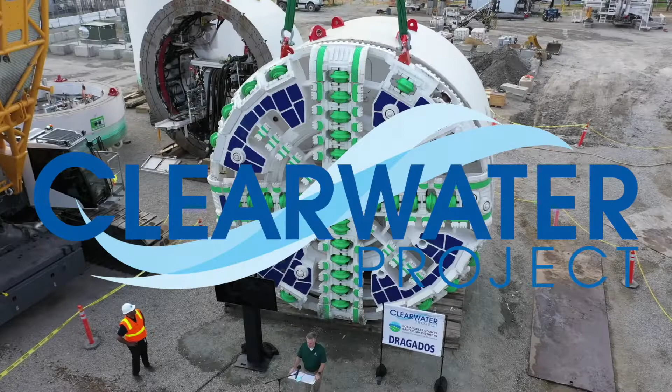I'm at the south end of our Joint Water Pollution Control Plant, which sits at the border between Carson and Wilmington. This is where most of the construction activity for our Clearwater project will take place. We're holding today's event to celebrate an important milestone on our Clearwater project, which is being built to protect local waterways. Soon, the huge tunnel boring machine, or TBM, that you see behind me will be lowered below ground and begin a 3.5-year tunneling journey.

Our program today is about 25 minutes long, and it involves a few speakers, the unveiling of our custom-built tunnel boring machine, and recognition of the finalists in our TBM naming and art contest. With me is Basil Hewitt, an engineer and Sanitation Districts supervisor. Now, because the TBM is so big, Basil's going to introduce you to it in pieces throughout our program. After the main program, we're going to offer a virtual tour for those who want to stick around and learn more about the tunneling process or ask questions.

Our first speaker this morning is Robert Ferrante, Chief Engineer and General Manager for the Sanitation Districts. Robert?

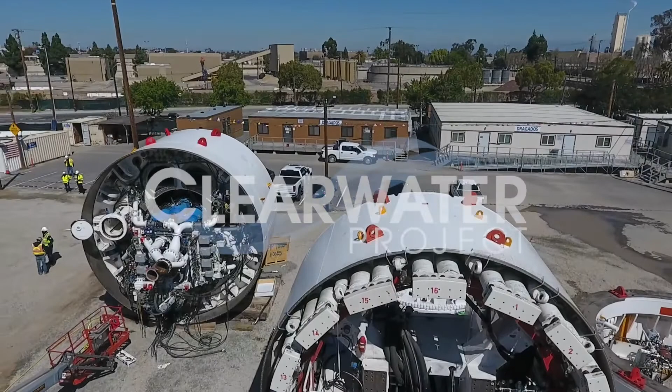Hi, I'm Glenn Acosta, an engineer with the Sanitation Districts. I'm at the south end of the Joint Water Pollution Control Plant, where most of the above-ground construction for the Clearwater Project will occur. The joint plant is critical because it treats sewage for 5 million people.

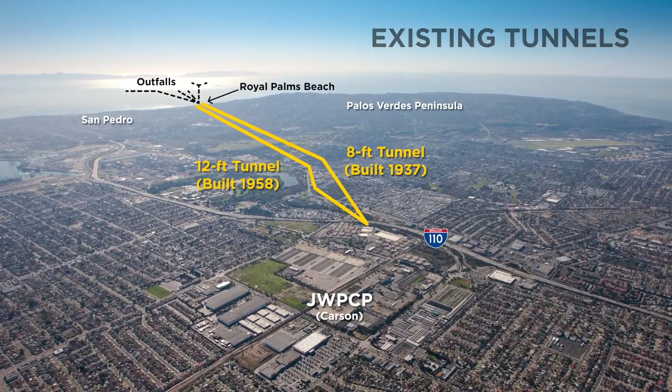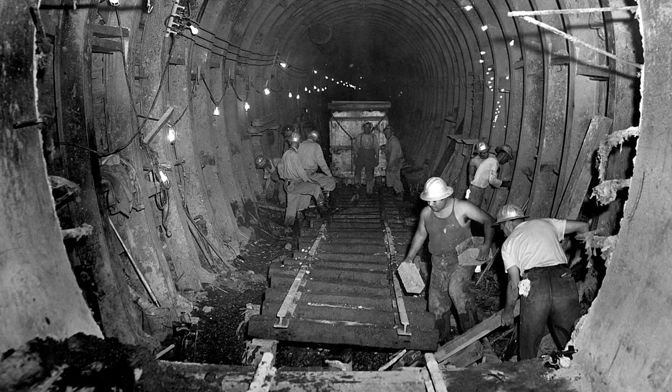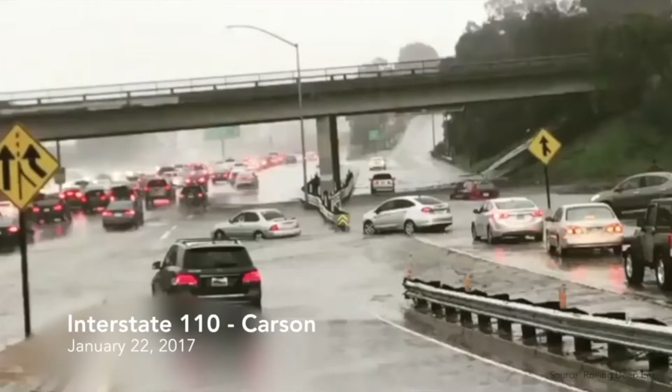The plant depends on 2 old tunnels to carry treated water to the ocean. These tunnels were built 60 and 80 years ago, and there are several concerns with the tunnels. First, the tunnels cannot be taken out of service for inspection or repair because they continuously carry flow. Second, the tunnels were not built to current seismic standards, yet they cross 2 earthquake faults. Third, the tunnels' capacity could be exceeded during heavy storms when rainwater gets into the sewer system.

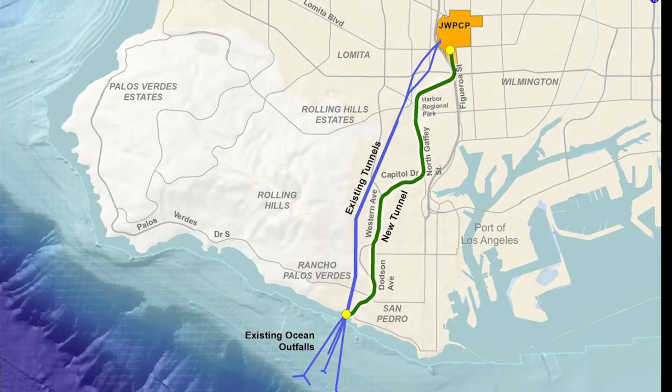After years of planning and community outreach, we concluded that building an 18-foot diameter tunnel was the best way to address these concerns. The new tunnel will provide reliability for a sewer system that serves almost half of Los Angeles County. The new tunnel will run 7 miles from the joint plant to Royal Palms Beach in San Pedro. And, based on community input, the new tunnel will be built almost entirely under city streets.

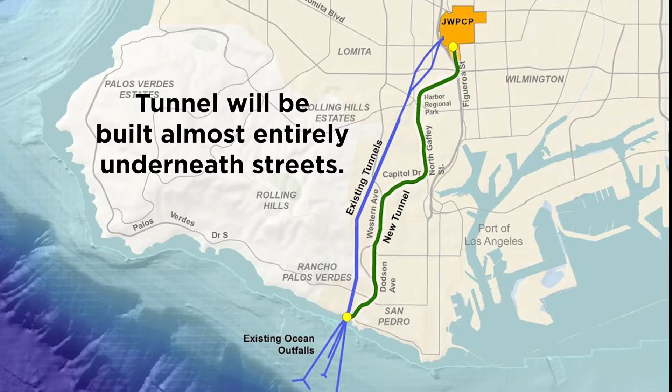A state-of-the-art tunnel boring machine, or TBM, will be used for this project. The TBM will be lowered down the shaft about 90 feet and begin tunneling this summer. Tunneling is expected to be finished in the year 2025 and the overall project completed a year later.

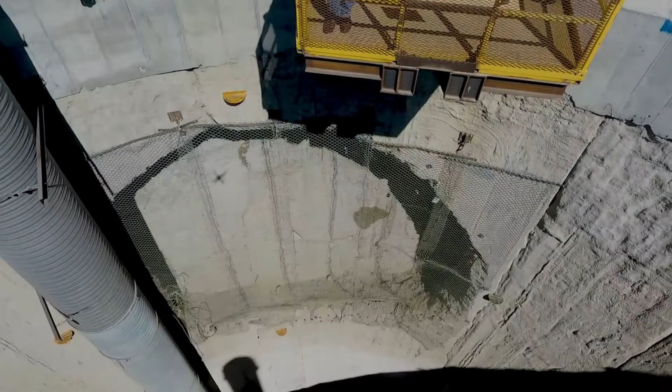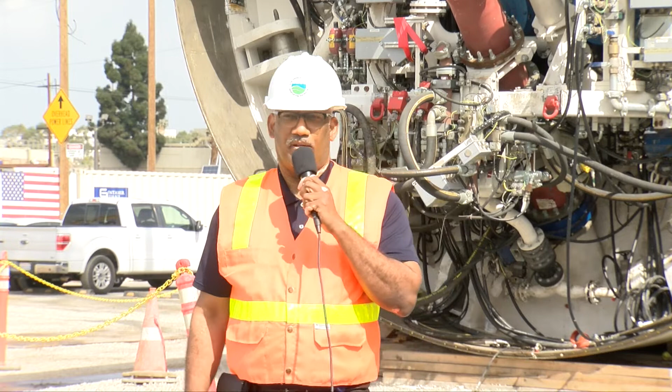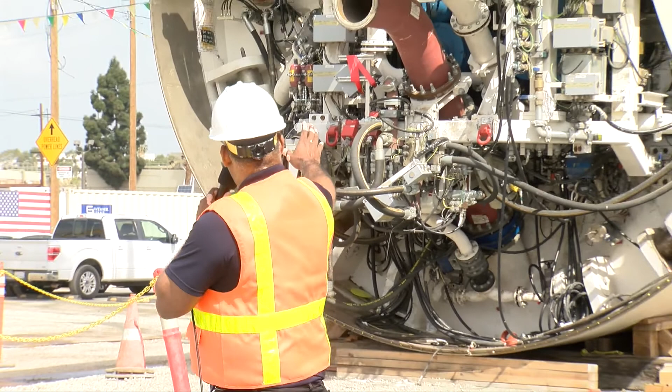Good morning, everyone. What a lovely day to look at a tunnel boring machine. What you saw behind the podium, behind Robert and Brian, was the cutting head of our tunnel boring machine. I'm on the backside of that cutting head. If you look over my shoulder, this is the backside of the front of the tunnel boring machine. Embedded in this end, on the backside, are 7 electric motors, each 215 horsepower. They rotate ever so slowly and build our tunnel every day.

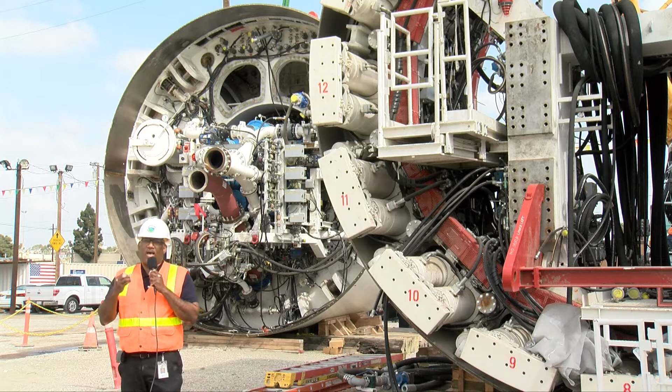They build between 30 and 50 feet of tunnel per day, and that translates to a top speed of 2 inches per minute, because this is a precise tunneling project. Another key in the front end of a tunnel boring machine, this is like the locomotive of a train, are these hydraulic thrust jacks, these white things here. There's 16 pairs of these, and they're all hitched together, like the front end of a train. These push off and move our tunnel boring machine forward on its 7-mile journey.

So there you have it, the front of our tunnel boring machine. Think of it as the locomotive of our TBM. Back to you, Brian.

Thank you, Basil. Our next speaker is Director Kathy Warner, representing the City of Whittier. Ms. Warner first joined the Whittier City Council in 2004, and she has served as the mayor on 3 occasions. She is also chairperson of Sanitation District Number 2, which is the administrative district for our agency. We appreciate her strong interest in the work that we do here at the Sanitation Districts, as well as the leadership that she's provided as our chairperson. Director Warner?

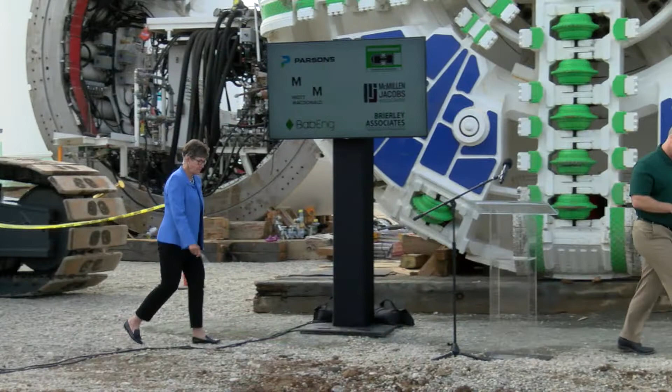Thank you, Brian. It's great to be with you all today. This is really exciting. I had no idea what to expect. It's really quite overwhelming. I've been a sanitation district director since 2005 and have followed this project since the planning days. This day has been a long time in coming. However, our very qualified staff has taken the right approach in carefully planning and designing such an important project.

On behalf of other sanitation district directors, I'm proud to serve on the governing board of the Sanitation Districts, and I'm excited to see the progress being made on this important project. I also want to thank all the students that participated in the naming and art contest and congratulate those winners. And I look forward to hearing from my colleagues on the board, Joe Buscaino and Pat Furey. Thank you.

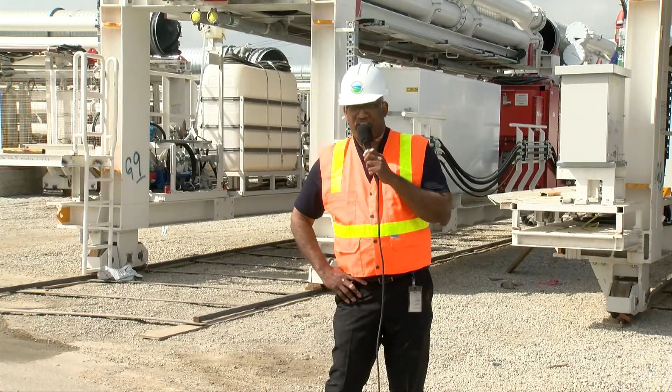And now we're at our second location. So the first stop showed you the front of the tunnel boring machine. Now we're at the second stop. This is called the trailing gear. Think of it as housing a little city that supports the front of the TBM.

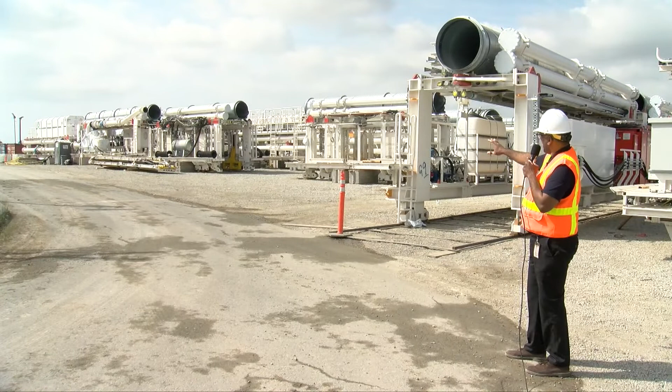And each of these segments, trailing gear segments you hear, think of them as rail cars. They will be hooked together one after another, and they will be pulled by the locomotive, the front of the TBM. So as this tunnel boring machine goes further and further along the alignment, all these trailing gears will be hooked together for a total length of about 700 feet of trailing gear and about 80 feet of the front end. So for a total length of 780 feet.

So let's look closer at the trailing gear. These tubes bring in important fluids, oil, water that's needed at the front of the tunnel boring machine. If you look at the big tube at top, that's for ventilation. It brings air all the way to the front of the tunnel boring machine where the cutting head's at. And then those 2 white tubes are very critically important.

One brings in a slurry or a mud, and what that does, it goes to the front of the cutting head and it lubricates the cutting head. It also stabilizes the front of the cutting head, and then that slurry is mixed with rock, gravel, and sand, and it becomes a pumpable mixture that gets pumped all the way out back to the shaft site, and then we will treat that when we bring that to the top floor. So there you have the first 2 locations, the front of the TBM, the trailing gear, for a total length of 780 feet. Back to you, Robert.

Thank you. Our next speaker is Joe Buscaino, councilman for the City of Los Angeles' 15th District, which runs from Watts to the Port of Los Angeles. The Clearwater Tunnel will go underneath his district. Councilman Buscaino first joined the City Council in 2012 and currently serves as its president pro tem. He is chair of the Trade, Travel, and Tourism Committee, which oversees the Port of Los Angeles, LAX, and the LA Tourism and Conference Board. He is also director for several sanitation districts and chairperson for 2. He is the immediate past president for the National League of Cities, where he continued to advocate for the federal government to increase infrastructure investment directly to cities, counties, and states.

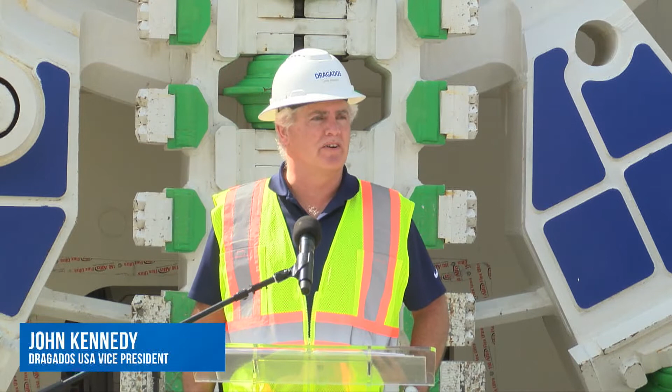Thanks again. The company we've hired to construct the Clearwater Tunnel is Dragados USA. Dragados was selected from a small group of contractors who have the expertise to do a project like this. Our next speaker is John Kennedy, Vice President of Operations for Dragados. Mr. Kennedy. Thanks, Brian. Dragados has been building large tunnels all around the world for over 70 years. It's our proud pleasure to be working with the sanitation district on this important project.

We've acquired a state-of-the-art tunnel boring machine, custom built for this project. We believe we have the right machine, we have the right plan, and definitely the right people. Soon we'll start lowering this tunnel boring machine into the shaft, where we'll complete assembly and then begin the mining progress all the way to the beach. And in about 5 years, we hope to see you all again for a celebration ceremony at the conclusion.

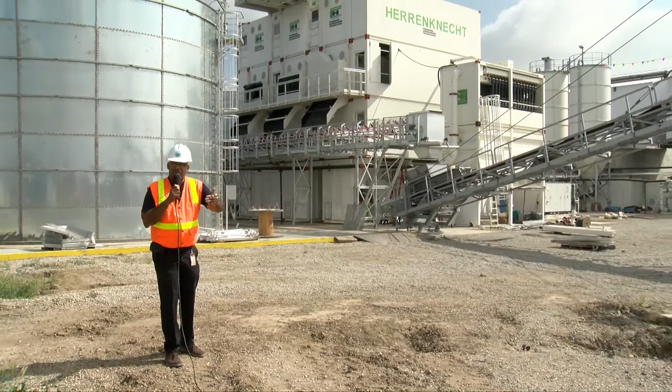All right, we're here at our third and final stop of our behind-the-scenes tour of our tunnel boring machine. We're at the slurry treatment plant. In most mining or tunneling operations, there are a couple of ways of removing the soil and rock. You can have conveyor carts, rail carts, conveyor belt. For our tunnel boring machine, we're going to be using slurry, as I mentioned in the previous stop. So at this plant, we create a slurry, which is a muddy type substance. We pump it to the front of the cutting head that you see behind the podium with Brian and Robert.

And that slurry mixes with the rock and the gravel and dirt and becomes a pumpable mixture. We pump all that stuff from the front of the tunnel boring machine back to the shaft site, up to the ground surface, and then in this building, we separate the slurry from the dirt, the rocks, and gravel. That dirt, rock, and gravel then comes out of this building. It's put on a conveyor belt that's loaded on trucks, taken off site.

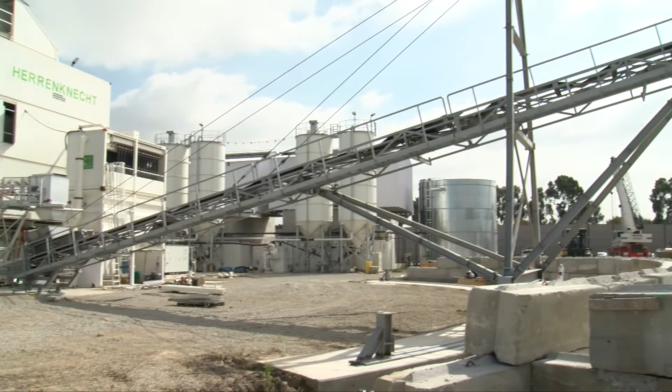And then the slurry, the cleaned up slurry, we recycle that to the front of the cutting head, to the front of the tunnel boring machine. So there you have it, a quick 1, 2, 3 of everything you'd want to know about a tunnel boring machine. Back to you, Robert.

Thanks, Basil. Before I introduce our tunnel boring machine, I do want to thank John Kennedy from Dragados for being here. They've been a great partner on this project, and we're lucky to have them. I also would like to thank Council Member Joe Buscaino for his support of the sanitation districts and the City of Los Angeles for their assistance in moving this project forward with their help as well.

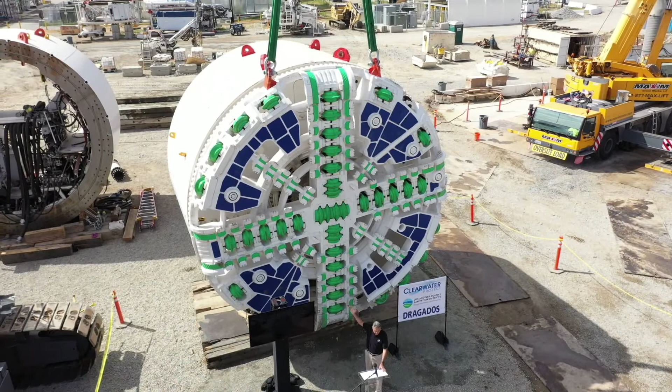But now it's my pleasure and honor to formally introduce Rachel, our tunnel boring machine. The machine is built to slowly carve its way through soil and rock deep below the ground without interrupting our daily life in the community above. Rachel was built by one of the world's top TBM manufacturers. She was tested at the factory and then had to be disassembled and shipped to our site in pieces. When fully assembled, Rachel will be over 2.5 football fields long and serve like a small underground city.

The name Rachel is for Rachel Carson, the author of Silent Spring, a book that is credited with sparking the environmental protection movement in the 1960s. This is particularly an appropriate name because the Clearwater Project is about protecting water quality, and I can't think of a better environmental hero to honor as a namesake for the tunnel boring machine. The name Rachel came from a student naming contest. The winner and other finalists will be recognized in our next segment.

In our next segment, Torrance's Mayor Pat Furey will introduce the finalists of our TBM Naming and Art Contest. Mr. Furey first joined the Torrance City Council in 2008 and has served as the city's mayor since 2014. He's also chairperson on 2 sanitation district boards. Mayor Furey is a voting delegate on the National League of Cities, and he is chairperson of both the state and federal legislative advocacy committees.

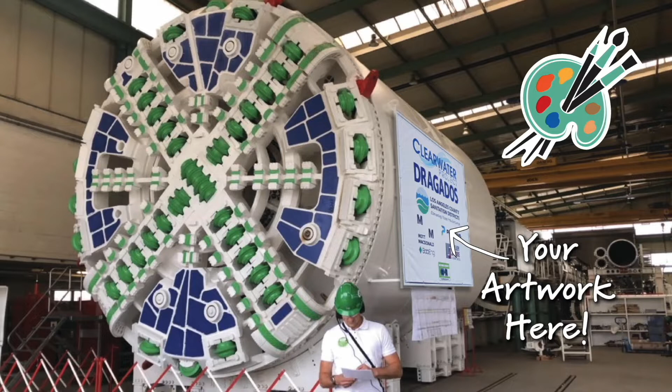Thanks for participating. There were also art contests for elementary, middle, and high school students. For each contest, students were asked to submit original artwork that shows why it's important to keep our rivers and oceans clean.

Congratulations to our elementary school finalists. Dahlia, Aaron, and Dagny, you all did a great job. Give yourselves a round of applause. I'm now with the middle school art contest finalists. Our third place winner is Natalie Ezadijian, a 7th grader at C&E Merdinian Armenian Evangelical School in Sherman Oaks. Natalie's art is a reminder of what can happen if we don't take care of our oceans.

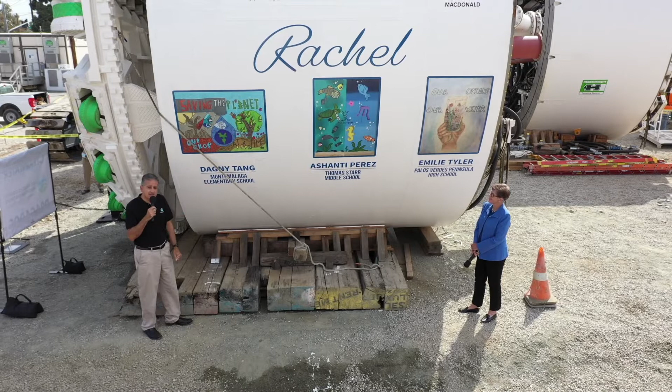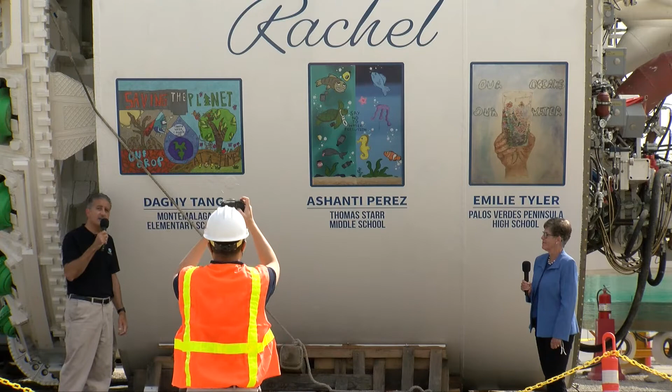And here is the artwork that is along the side of our tunnel boring machine. You can see the winners of the contest, and you can see, of course, we thank Hannah for coming up with the name Rachel. Hopefully this artwork, along with the Rachel name, will give us good luck as we make our 4-year journey to the coast and leads to a successful outcome. Once again, we'd like to thank not only the winners, but all the kids that contributed and submitted drawings and names for the project. All of them were very creative and original.

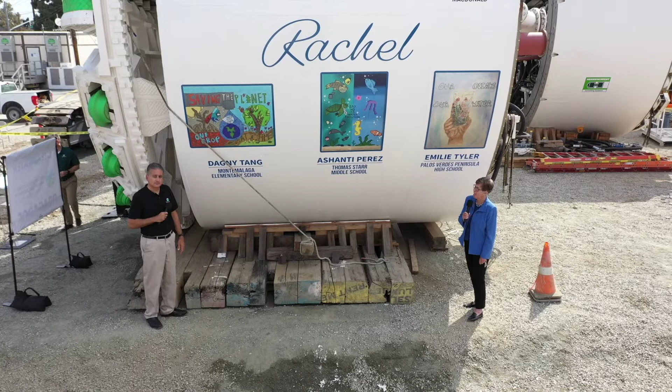Thank you. Thank you to all the children that participated of all the grade levels. We really appreciate your participation, and particularly Dagny, Ashanti, Emilie. Congratulations on having your pictures on the side of this awesome machine. Thanks again.

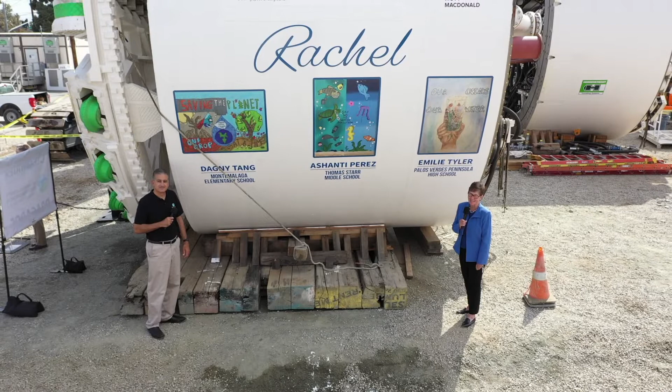Well, that concludes our main program this morning. On behalf of the sanitation districts, I want to thank all of our speakers. To find out more about the tunneling process, stick around for our virtual tour, which is up next. You can also find out more about the project using the information shown on your screen. Thank you for joining us this morning.

Now I want to hand things off to Russ Vicaria for the virtual tour. Russ is a supervising engineer in our construction management group. He and his team are working closely with Dragados to make sure that the project is a success. Russ, take it away. Hey, thanks, Brian. And good morning, and thanks everybody for joining us. I'm going to give you a brief overview of the tunneling process. And if you have any questions, please use the Q&A feature in Zoom during the presentation, and then I'll take questions at the end.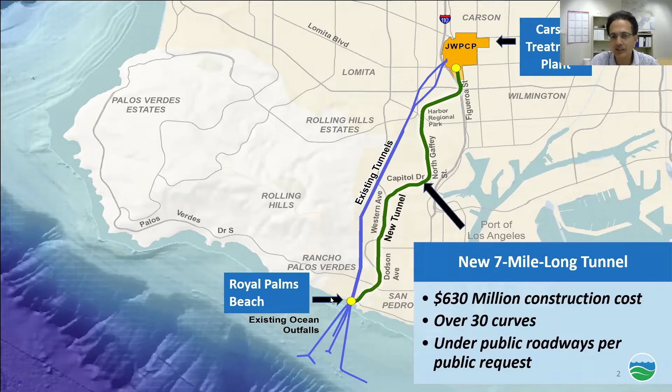So this is a 7-mile tunnel, $630 million construction cost with over 30 curves going all the way from our treatment plant in Carson to Royal Palms Beach. So the starting point of the tunnel, which Glenn talked about earlier, is the tunnel shaft. And here's the shaft site. It's an aerial view. The TBM ceremony you just saw was held in this location on the bottom left-hand corner.

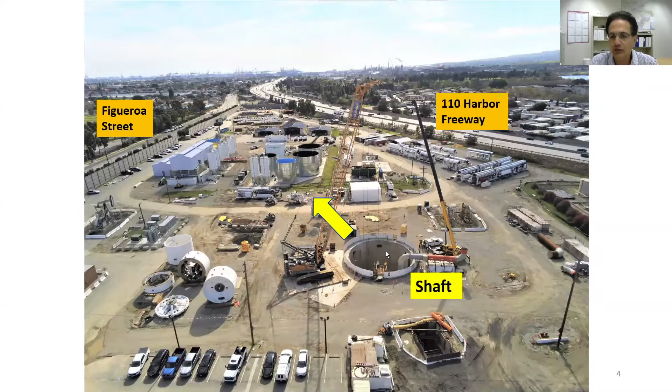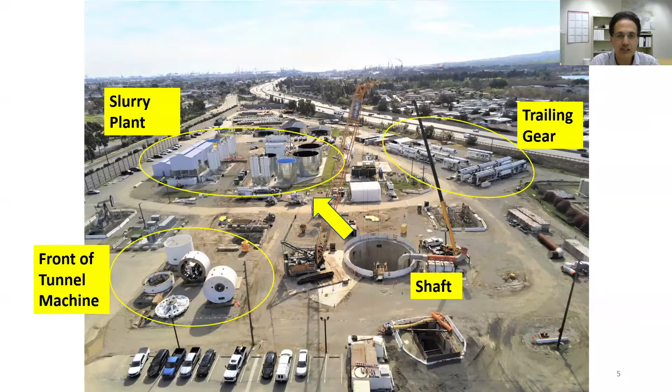To give you some bearings, here's Figueroa Street on this side. Here's the Harbor Freeway. And the shaft that the tunnel machine is going to be lowered into is shown right here. And the tunneling will go in the direction of this yellow arrow. So as Basil showed you during this presentation, we've got the front of the tunnel machine here on the bottom left-hand corner. The trailing gear is on the right side in this location. And then the slurry plant that'll support the tunneling is shown here. And I'll go through some of those in more detail.

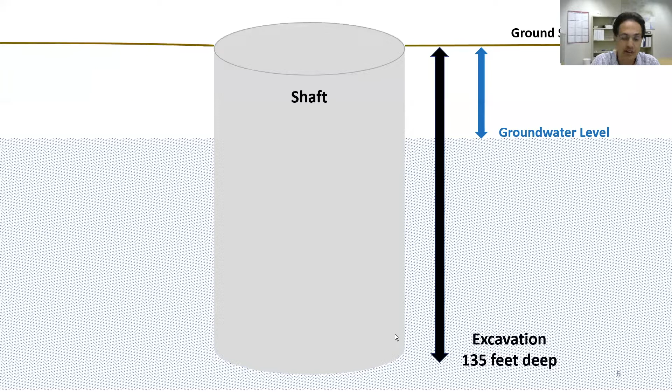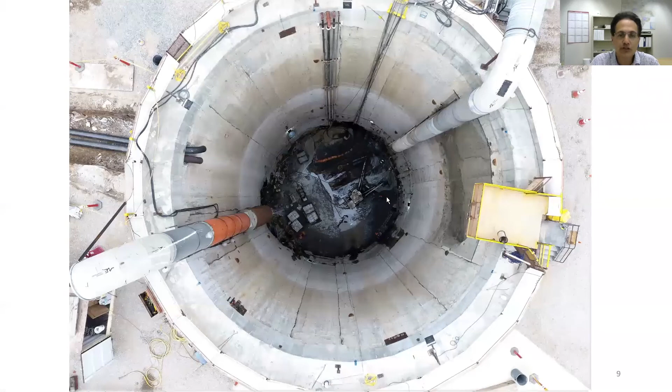So in general, the point of the shaft is to launch the tunnel machine. So here we have a side view of the shaft. Here's the ground surface. The groundwater level is here. So you can tell that we're going to be putting the tunnel machine well under groundwater. The total excavation for the shaft was approximately 135 feet. So the point of the shaft is to lower the tunnel machine into it and then to begin tunnel mining. And here's an overhead shot of the shaft that was taken a few weeks ago.

So here on the left side, we have the Carson shaft, where the tunnel machine is going to start. On the right side, you see the exit shaft at Royal Palms Beach. The ground surface is shown above. The tunnel route is pretty flat, but you can see the ground surface changes a lot. So the first half of the alignment is about 45 to 90 feet deep. And then the second half, we get as much as 460 feet deep under the Palos Verdes Peninsula. So again, we start on Figueroa Street, go through Harbor Regional Park, onto North Gaffey, then Capitol, then onto Western Avenue, Dodson, back to Western, and then to the Royal Palms Beach site.

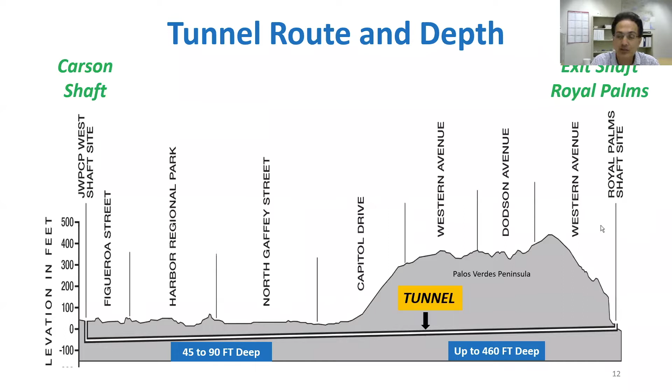So again, here's a similar diagram. It's just colorized. The tunnel route is shown with the red dots. Here we have on the left side the Carson shaft, the starting point, and then the exit shaft on the right side. And the groundwater is shown with the blue line. And you can tell that the groundwater is here. So we're under groundwater the entire way. And all the different colors you see on this section are different types of ground. So this tunnel machine has to be versatile enough to handle all those different ground conditions.

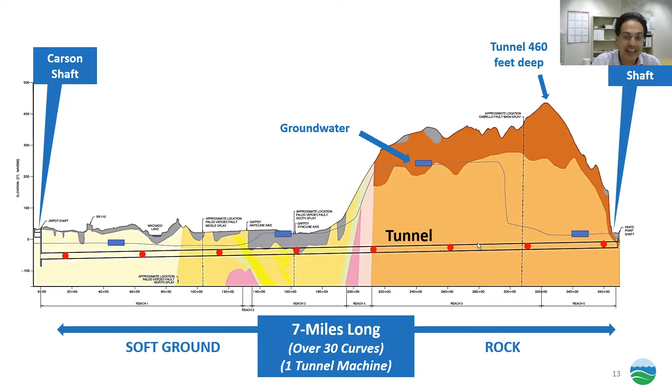So in summary, this 7-mile route, the first half is soft ground, but it's different types of soft ground. The second half is made up of rock. So again, if there was some intermediate shaft, the contractor could have even chosen to use 2 separate tunnel machines because the ground conditions are so different. But because we're going from one shaft, this tunnel machine has to be versatile enough to handle all these ground conditions. So let's talk about the tunnel machine itself.

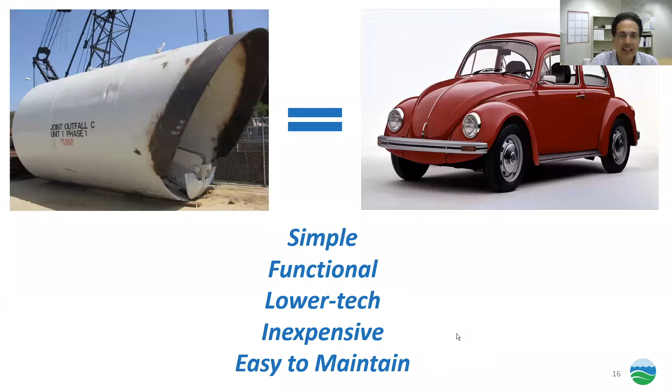And if the conditions are correct, it's a very effective tool. But this job involves numerous challenges that require a more advanced tunneling machine. First of all, we've got 7 miles of tunnel with 30 plus curves from one shaft. And if you look at a lot of the other local tunnel jobs going on in LA, many of them are straight 1 to 2 mile long tunnels. So this is considerably different.

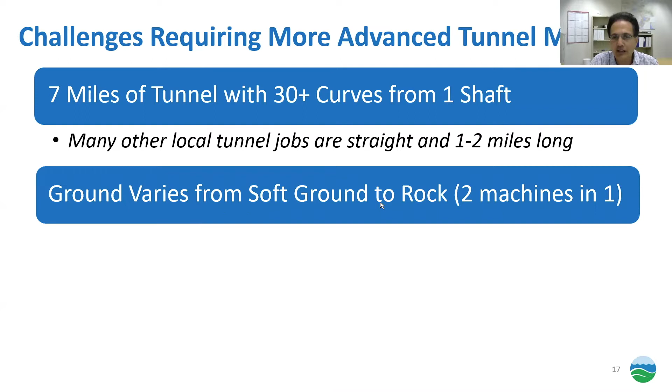The ground also varies on this job from soft ground to rock, and there are numerous subcategories within these. So really, you have one machine doing the job of 2 that has to be able to handle all these different conditions. The entire tunnel is also below groundwater level, so the tunnel machine has to be able to handle significant earth and water pressures and squeezing ground along the way.

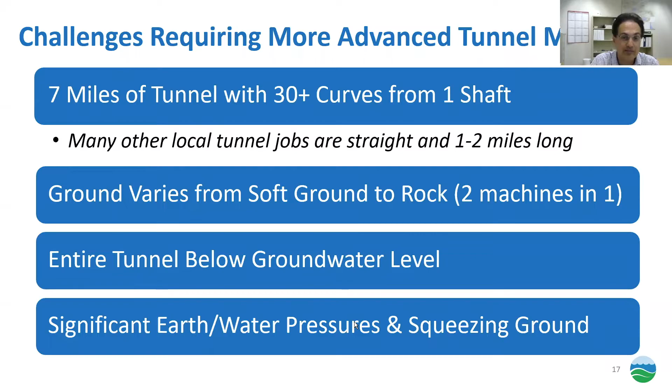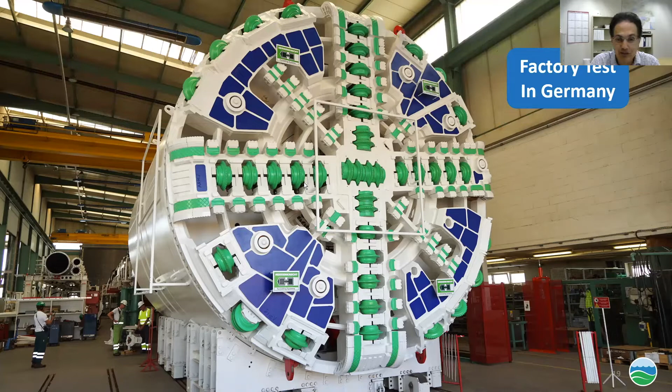So here is the tunnel machine. You saw it a little earlier today. It was fabricated at Herrenknecht factory in Germany, which is probably the premier TBM manufacturer in the world. It was put together and factory tested, then taken apart and shipped to the site. The diameter of the tunnel machine is about 21.6 feet. So it's like a 2-story building plus. The whole head rotates, and then you've got various cutting tools on the head that help dig the ground.

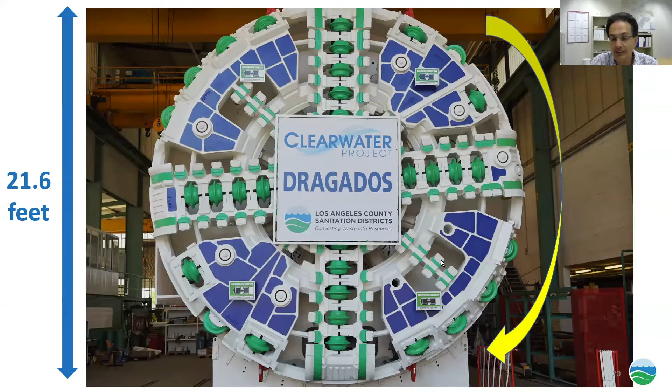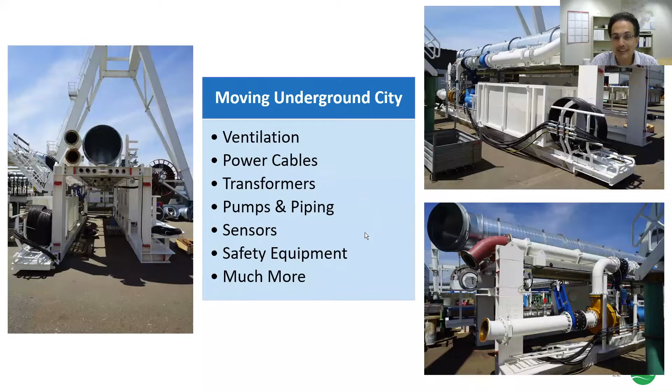So here's the front of the tunnel machine as it was assembled in the factory, and it pulls along this trailing gear behind it, which Basil talked about earlier. And again, as he mentioned, this trailing gear is like a moving underground city. It's got to support the entire tunneling operation, the materials, the personnel, the safety issues. So it's got ventilation, power cables, transformers, pumps and piping, sensors, safety equipment, and much more.

And one of the things it carries is a control cabin where the TBM operator sits and looks at various screens. This is a very sophisticated machine, so it throws out a lot of data which the TBM operator has to watch and make adjustments as needed during the tunneling process.

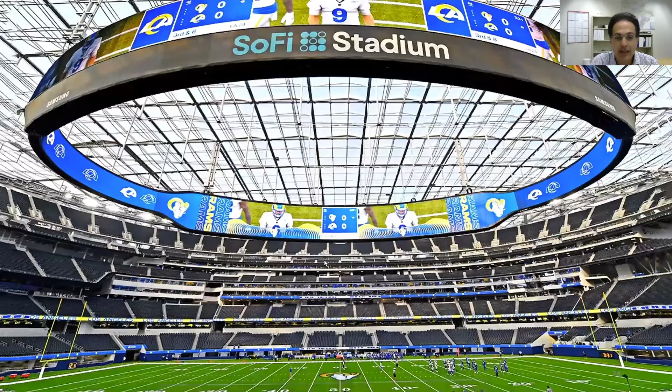So to give you an idea of how long this tunnel machine is, and it was stated a little bit in the presentation, but here we've got SoFi Stadium where the Rams play. We know that a football field is 300 feet long, 100 yards. So if you superimpose the tunnel machine on it, it not only stretches one full football field, it really stretches more than 2.5 football fields. And so it's over 750 feet long, and it was delivered to the job site in over 90 truckloads and then put together.

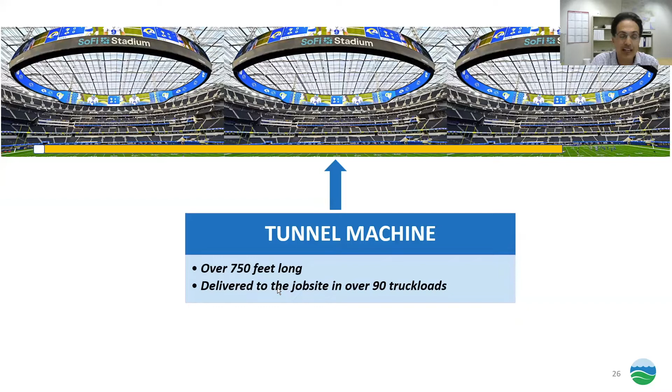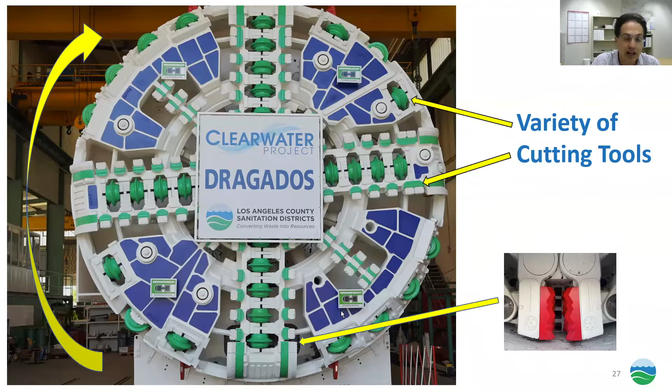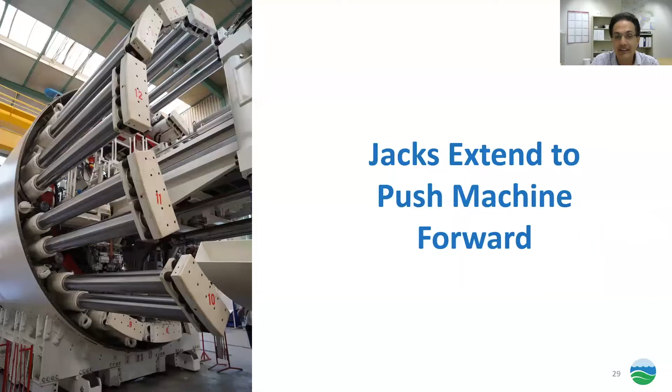So again, as I mentioned, the way the tunnel machine works, the rotating head turns. You have various cutting tools that help break up the ground. You've got a rock crusher that looks like this at the bottom, which crushes up any kind of rocks that come into the cutting chamber. And as was discussed again, here are the thrust jacks, and this is what moves the machine forward. So you've got 16 double pairs of thrust jacks, and when they extend, they push the machine forward, and that's how it's propelled forward.

So here's a basic video of the tunnel machine and how it operates. So what you'll see is the head turns, the excavated material comes into the cutting chamber. The machine is pushed forward by these jacks, and the jacks push forward on the last erected concrete ring that the tunnel machine erected. And each ring is comprised of 6 pieces, which are called segments.

So you'll see the tunnel, the head moves, the jacks are pushing the machine forward, and then each jack retracts, and you'll see a new ring being constructed. And then once the ring is constructed by the tunnel machine, then it'll push off again, and that's how the tunneling process works.

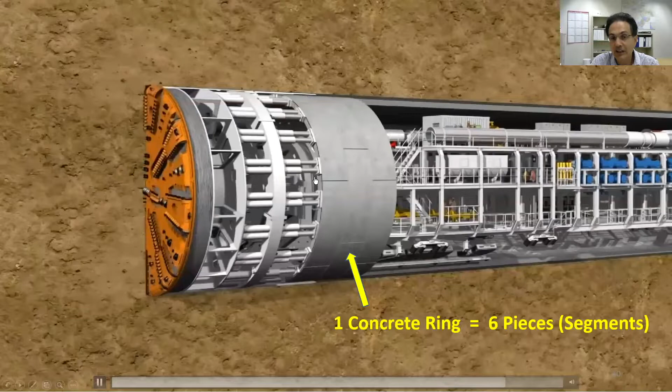So these tunnel segments and rings are being produced in a facility in northern LA County. Here's one of the molds used to fabricate it, and the arrows show where the tunnel segment sits inside the mold. And here's a picture of the mold with the top open. Reinforcing steel is put in here, or fibers, and then concrete is poured, and it's a highly mechanized line. So you see the robots doing some of the work and people doing the rest. So this fabrication process is just starting right now.

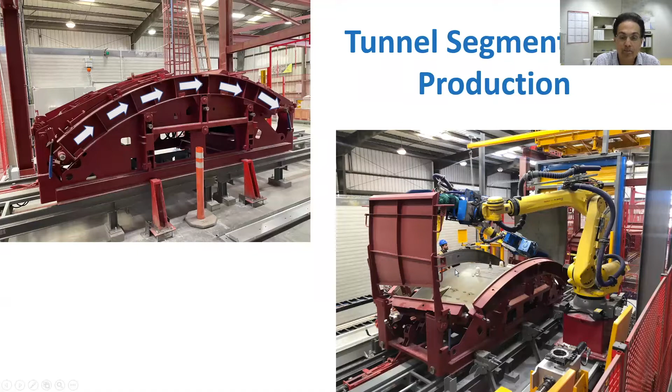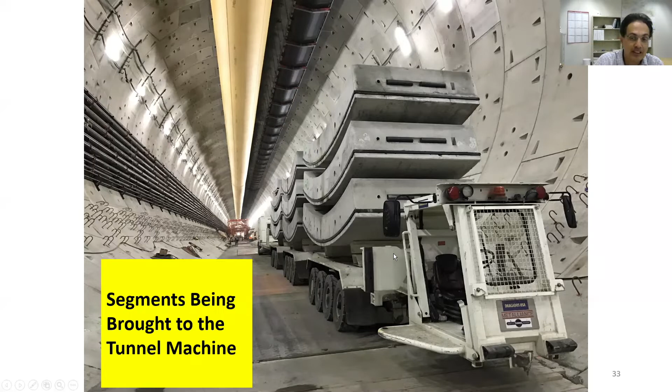So here's a picture of some similar tunnel segments from another job. So once the tunnel segments are fabricated, they'll be trucked to the site, and then they'll be brought to the tunnel machine through the tunnel using a carrier like this. And this sort of carrier not only brings segments, but it brings other material. It brings personnel to the front of the tunnel machine and materials.

So while the tunnel machine is working, it's important that we monitor the ground to make sure the tunneling process is working properly. So here's the tunnel machine moving along. So we have ground settlement points throughout the alignment. So if there's any movement in any of these points, we see it in real time on our cell phones

or computers. But we don't only want to monitor the surface, we also want to monitor underground, because by the time an issue may move its way to the surface, it takes some time. So we have these underground settlement points, and you can see that the bottom point is right above the machine. So we can detect any kind of ground movement underground. And again, this information we see in real time.

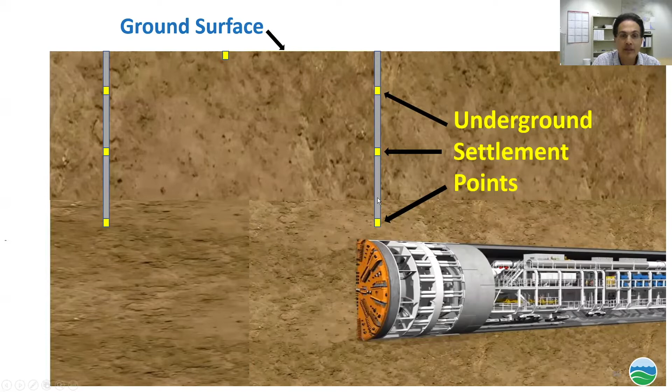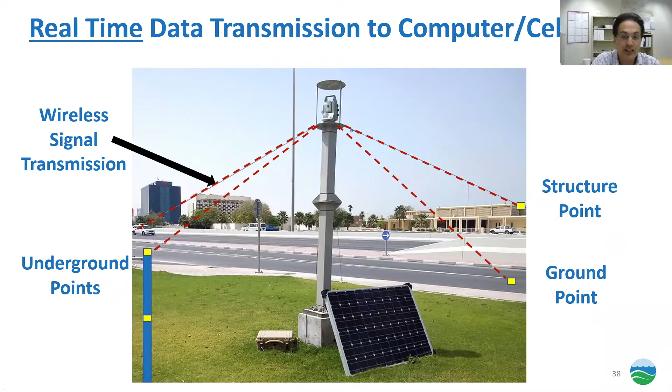We also have utility settlement points that are placed on various utilities throughout the alignment, and also vibration and noise monitoring sensors throughout the alignment. So all these sensors, whether they're underground points, structure points, or ground points, transmit their information wirelessly to these total stations, and then these transmit the data to, again, our cell phones, our computers, so both the contractor and the district have this information in real time, and the TBM operator does also. So any adjustments that need to be made can be.

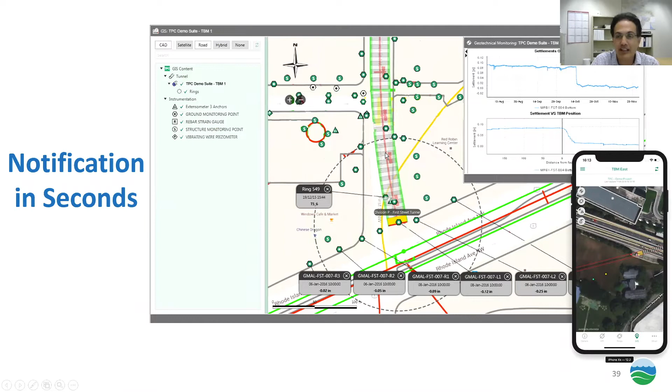So that's the ground monitoring, but we're also monitoring the data that comes off this tunnel machine. So this tunnel machine is very sophisticated, has a lot of equipment, and the tunnel machine is constantly generating data on the tunneling process, such as the excavated quantity, the thrust force, cutting tool wear, pressure, and many more.

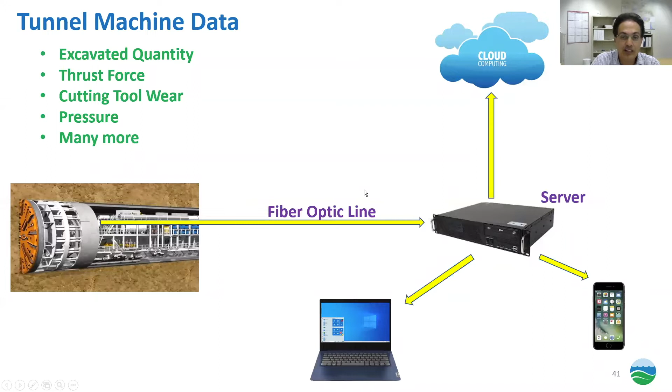And so there's a fiber optic line that runs from the tunnel machine to a server on the surface. And so all this data is being transmitted in real time. And again, it gets sent to computers, cell phones, it's backed up on a server. So in this way, the contractor and the district can monitor the tunneling operation constantly and make sure it's going well and make any adjustments that are needed.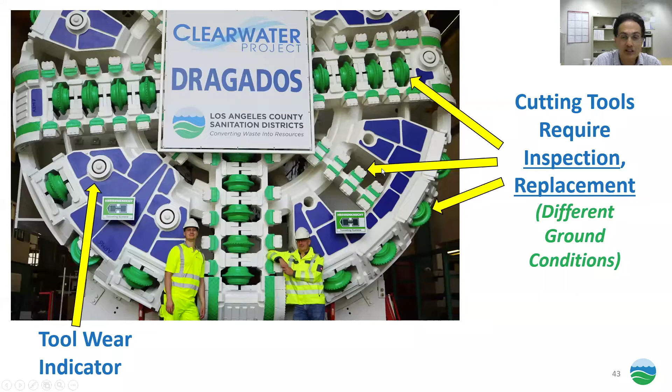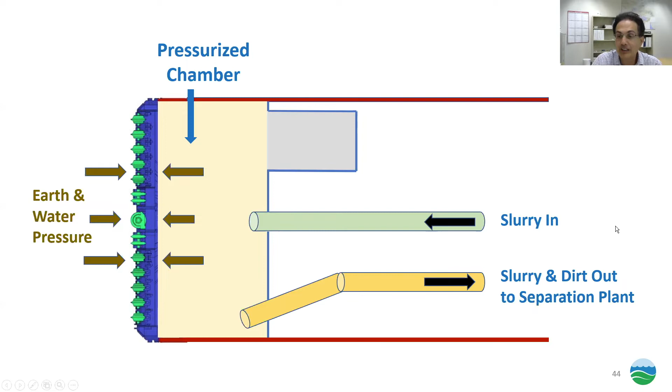And so the idea is to match the pressure from the outside with pressure on the inside so that you don't have any kind of ground settlement. And then as the tunnel machine digs, material comes into this chamber, and the slurry and dirt combination come out through this yellow pipe, and they're sent to a separation plant where the bentonite is separated from the dirt, and then the slurry is recirculated back to the tunnel machine.

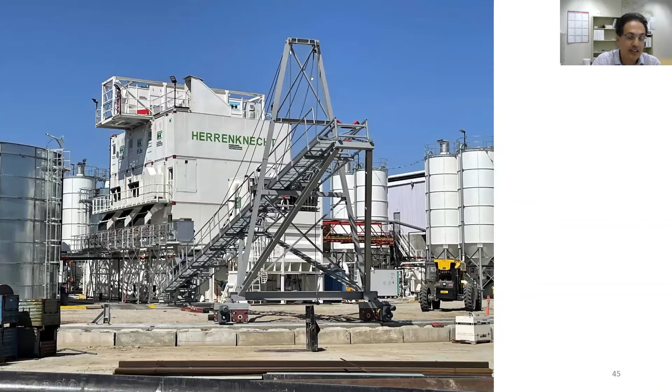So there's also another important thing that needs to be done, which is inspecting the cutting tools. So the way the cutting tools are inspected is that you have this pressurized chamber. So all the slurry is drained from the chamber, and then air is placed in this chamber under pressure, because you still want to equalize the pressure between inside and outside the tunnel machine. And then personnel make entry using breathing apparatus, because you've got pressurized air, and then they can inspect and replace the cutting tools and alike.

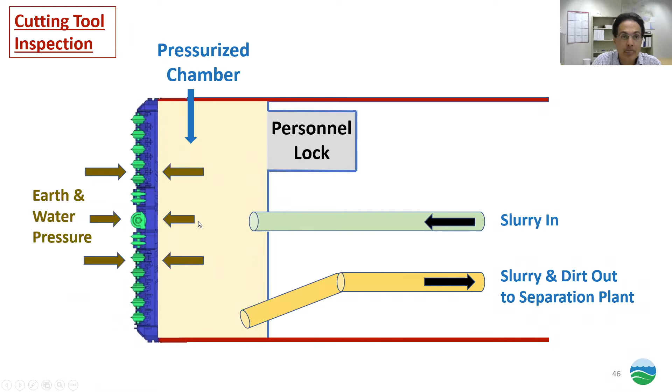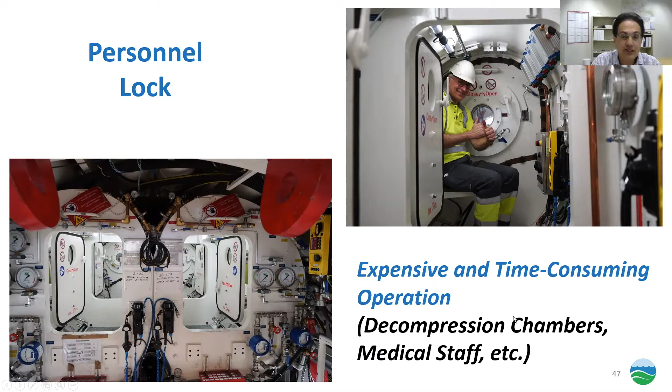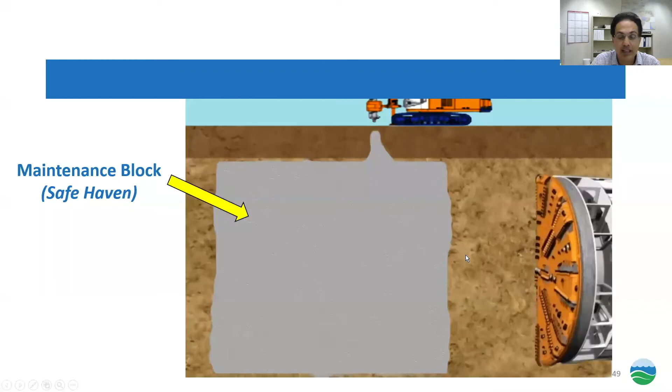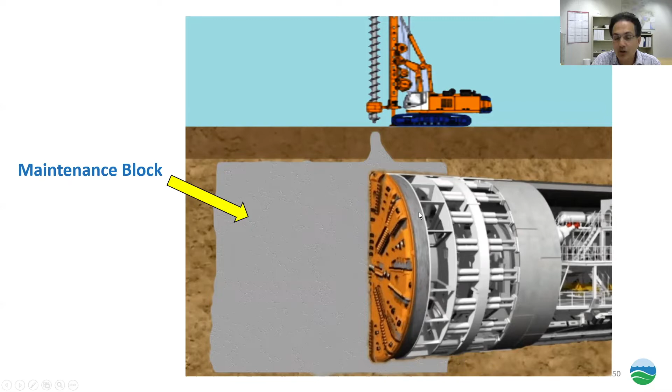This sort of intervention can be done at any time during the tunnel drive, but we've also put in 3 planned maintenance stops, which makes maintenance and checking of the machine easier at these planned areas. So in 3 areas along the alignment, the contractor has pumped grout, which is like a cement mix, into the ground and created an underground block. And then what happens is the TBM, the tunnel machine, drives into the block, and then it can be depressurized. So you don't need all the breathing apparatus and all that. You can breathe normally, come into the chamber and check the tools.

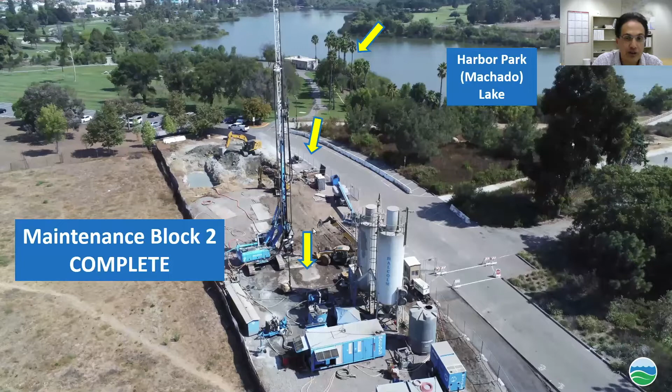Here's a picture of one of the maintenance blocks being constructed. This is the one in Harbor Park, and the tunnel machine will come across Harbor Park under Machado Lake and stop in this maintenance block. This site has been restored. This is just a picture from a few months ago when the construction was going on. So as I said, these 3 maintenance blocks are already complete.

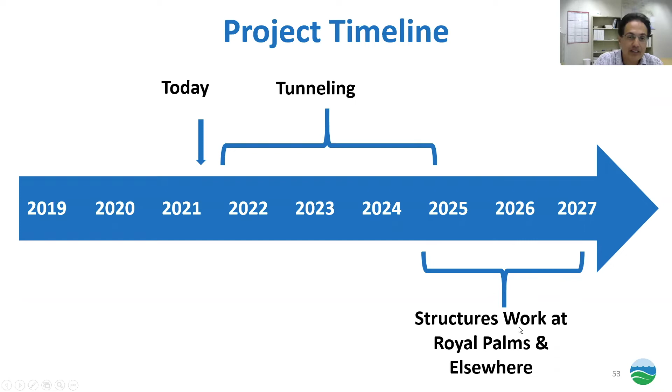So the general project timeline, we're here in April 2021. The tunneling is going to start in the middle of this year. And then we've got 3.5 years of tunneling. And then there'll be additional work, structures work at Royal Palms Beach and elsewhere, which I haven't covered in this presentation, but we'll go over in other presentations in the future.